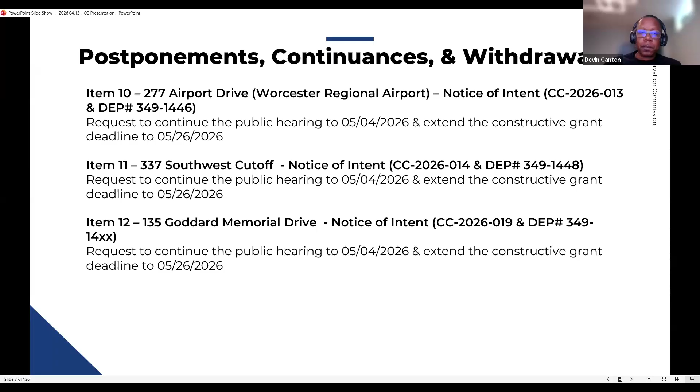First, are there any requests for continuances, postponements, or withdrawals? Yes, we have 3 requests for postponement tonight. All of these are requests to postpone the public hearing to May 4th, 2026 and extend the constructive grant deadline to May 26, 2026. We have item number 10, 277 Airport Drive, item number 11, 337 Southwest Cutoff, and item number 12, 135 Goddard Memorial Drive. Again, those are all requests to postpone the public hearing to May 4th and extend the constructive grant deadline to May 26th. Make a motion to postpone items 10, 11, and 12 as described. Second. Commissioner Canton? Aye. Commissioner Kirshner? Aye. Commissioner Nystrom? Aye. Commissioner Frattoni? Aye.

First order then of new business, a request for determination of applicability for Salisbury Street, Moreland Street, and Old Brook Drive rights of way, and 629 and 633 Salisbury Street. Is there somebody online from the city for this project? Yep.

Yes, my name is Steve Daunais. I'm from Tata and Howard. We're the engineers working with the city on this project. So this is a water main project along the streets shown here. It's replacing an existing water main. Road work is going to be within the existing paved area. There's probably two brook crossings.

And yes, it's highlighted project location towards the top and a project location at the bottom. And they're going to be directional drilling under the river in both cases. So access pits are 60 to 70 feet away from the edge of the water, and then it's just going underneath and coming out the other side.

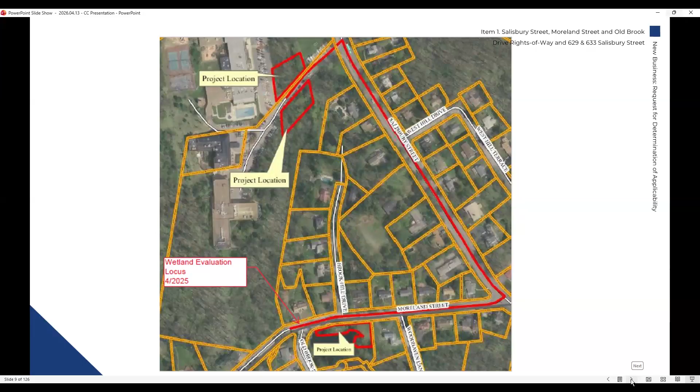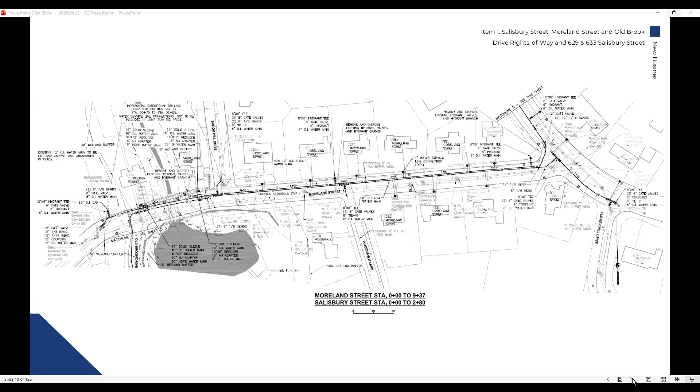Anywhere near the buffer zones, there will be straw wattles in place, silt sacks in catch basins just to prevent any debris getting into the waterways. Trenches will be backfilled at the end of every workday. Every Friday, temporary pavement will be installed. In the event of a heavy rainstorm or something else, temporary pavement may need to be installed prior to Friday.

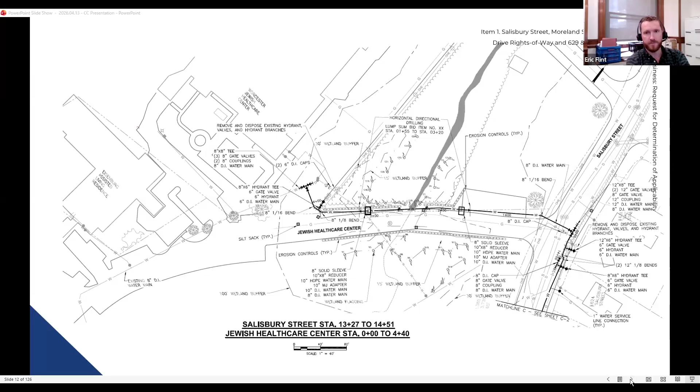We'd suggest a similar condition with a negative determination if the commission goes that route tonight. Our staff comments were minimal, just related to the type of sediment barrier, which I believe has been addressed with a revised plan, so we're all set. Commissioners, any questions or comments about the project?

I'd like to ask about the timing on each of these crossings. About how long do you expect it to take once you begin drilling, get the pipe in place, and close everything back up? I'm pretty sure they'll do each one in a day.

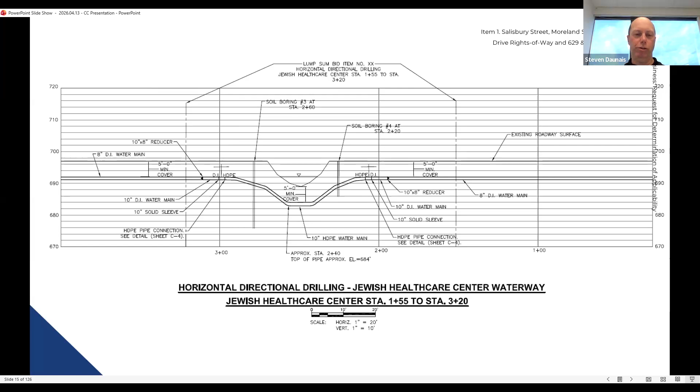So you're already familiar with the soil conditions underneath these sites, and I think one of them already has a crossing, correct? Let me get the street right - Moreland Street. Actually it's not underneath.

So there might be a day to prep and get ready, and then a day to install. Right, so a minimum amount of time for this to be open. I don't have any other questions.

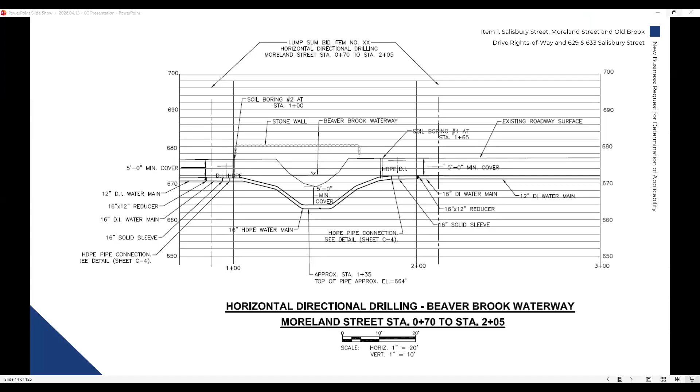I'm not seeing anyone. I'll make a motion for a negative determination. Second. Commissioner Canton, aye. Commissioner Kirschner, aye. Commissioner Nystrom, aye. Commissioner Fatoni, aye.

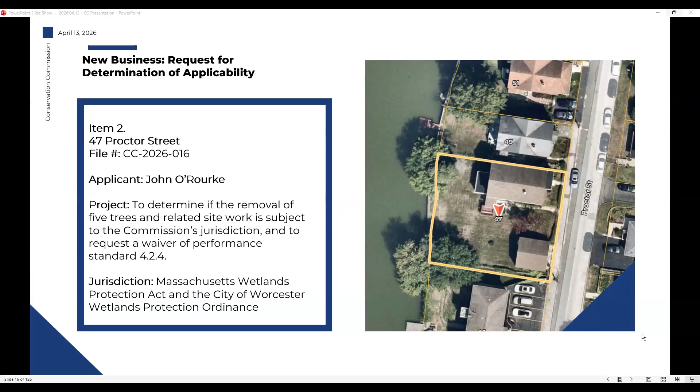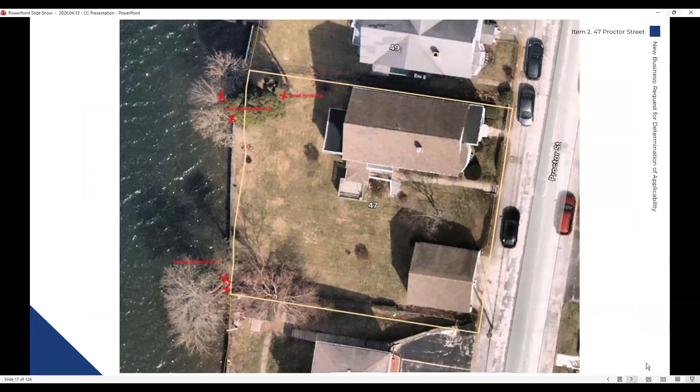That's great. There's trees by the retaining wall that have gotten so big they're at a 45-degree angle, and the branches were down in the water before the water came up 5 feet, so they're going to have leaves. You can see the pictures. They're going to crush these walls - these retaining walls are going to take the whole backyard into Indian Lake. So I'm asking permission to have a crane come in and park on Proctor Street.

It's like 50 feet. They're going to cut the trees about 6 inches to a foot above the base, lift them up, and bring them to Proctor Street to chip them and get rid of them. The wall is already cracking. What you're looking at right now, the water is probably 5 feet higher, and once the leaves come on and the waves start getting going, the wall's coming down, no doubt about it.

I don't even know what kind of trees they are, just horrible, ugly looking trees. I'll plant new trees to replace them - I love trees. But we have to get this done before my yard goes away. It's a rental. Understood, understood. Thank you.

Staff, any comments or questions about this project? So staff met with Mr. O'Rourke on site to look at the trees. There are essentially multiple stem box elders that are dug into the wall, with root systems dug into that wall at this point, kind of leading out over Indian Lake.

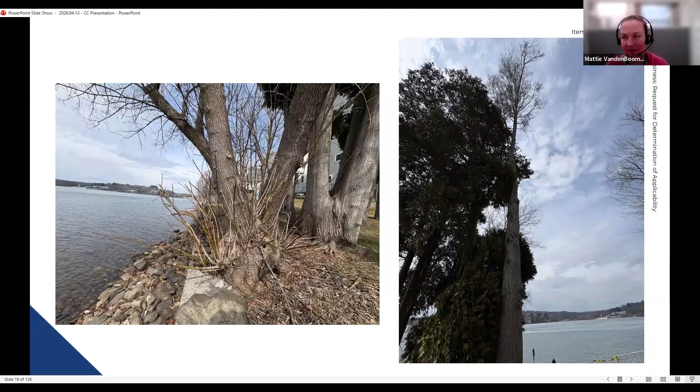Nope, you're good to move forward. If the scope of work changes for any reason, if you're not able to do the crane, just let us know. But other than that, you should be good to go.

Okay, thank you. Thank you very much. Thank you, have a good night. You too.

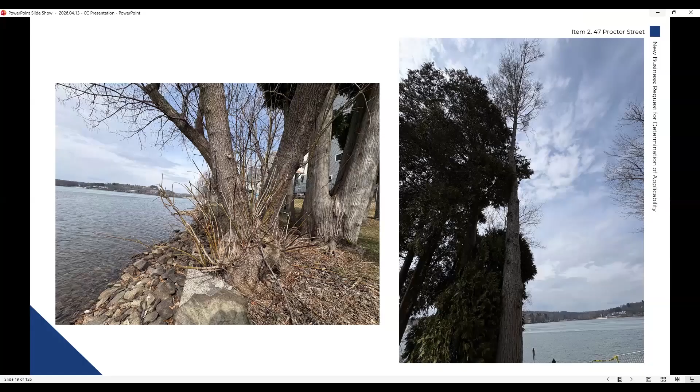Next item, number 3, 254R 504 Massasoit Road, 0 Sandra Drive, request for determination of applicability.

I was asked to unmute, but hi, this is Linda Hutchins with Mass Audubon. We're actually going to have Tom Lutzenheiser speak for us tonight. Okay Tom, you should be able to speak now. Good evening everyone. Sure, if you can hear me. Yes, I'm unmuted. Sorry about that. So I'm Tom Lutzenheiser, senior conservation ecologist with Mass Audubon.

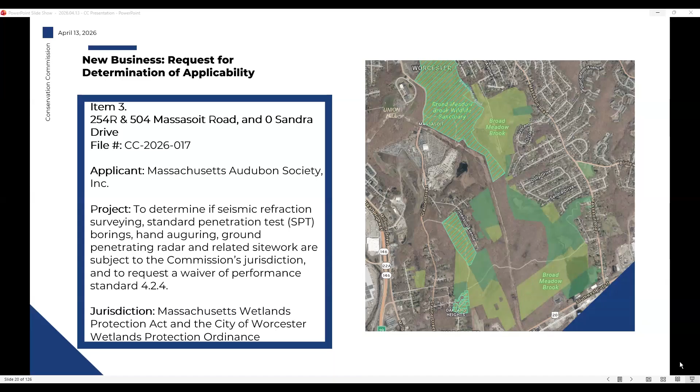For our RDA this evening, we are requesting permission to perform some geotechnical studies at Broadmeadow Brook. This is on property where the city is the deed holder under the Conservation Commission. This is in the context of getting preliminary information for the continued planning of a comprehensive wetland restoration project we are working on for the entire North Marsh area, between Dunkirk Ave and around this Sandra Drive area.

So at some point in the coming year or two, you'll be seeing a lot more information about this. In the meantime, we have a preliminary design and are working on developing permitting level plans to sort of kick the tires on our preliminary design. We are proposing various geotechnical studies, including seismic refraction studies, standard penetration borings, and ground penetrating radar.

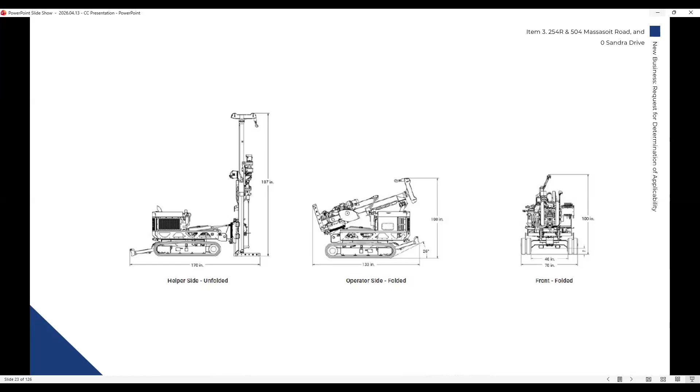Happy to answer any questions. Christy Pollock from Princeton Hydro, our consultant, is available as well. Or Linda, if you have anything to add.

We've reduced the number of borings proposed and are trying to keep this to as small an alteration, again temporary, as possible.

Any staff comments on the project? I think Tom just gave a pretty good summary. Our comments were mainly in relation to the standard penetration borings, given that involves the heaviest machinery to get down within the wetland resource area. So we had some questions about the temporary impacts that would result from that, how those would be stabilized, and what the proposal was for access. All those questions have been addressed at this point.

We would suggest a couple of conditions if the commission's willing to issue a negative determination related to fueling: that no fuel, oil, or other pollutants be stored within the resource area or 100-foot buffer, that any refueling of equipment take place outside of the 100-foot buffer zone, that the applicant shall take all necessary precautions to prevent the discharge or spillage of fuel, oil, or other products on any part of the site, and that a spill kit be present on site at all times.

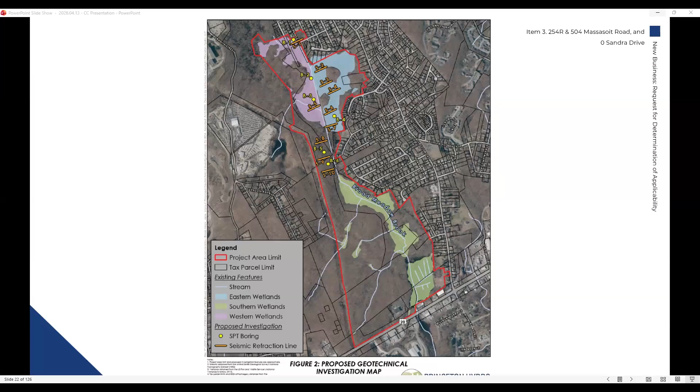Would the city be named as an additional insured? We had a discussion with the law department about this today, and the city would be looking to be named as an insured on a certificate of insurance for any of the contractors coming in with machinery.

Is there anyone from the public on this topic?

I'll make a motion for a negative determination with the conditions stated earlier. Second. Commissioner Canton? Aye. Commissioner Kirschner? Aye. Commissioner Nystrom? Aye. Commissioner Fertoni? Aye. You're all set on the RDA.

Just a reminder that staff recommends a separate motion to authorize this specific scope of work as the property owner. So moved. Second. Commissioner Canton? Aye. Commissioner Kirschner? Aye. Commissioner Nystrom? Aye. Commissioner Fertoni? Aye.

Next up, new business: request for amended order of conditions, 254R, 504 Massasoit Road at 0 Sandra Drive.

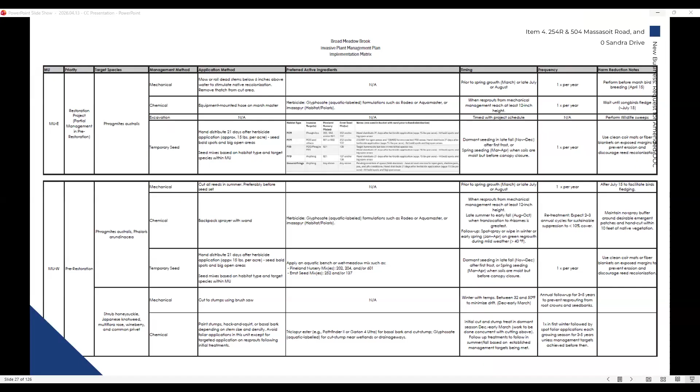The chemicals proposed for this are entirely temporary. They do not have any residual action on the seed bank. They're contact herbicides, and once they're absorbed into the plant, they are in the plant.

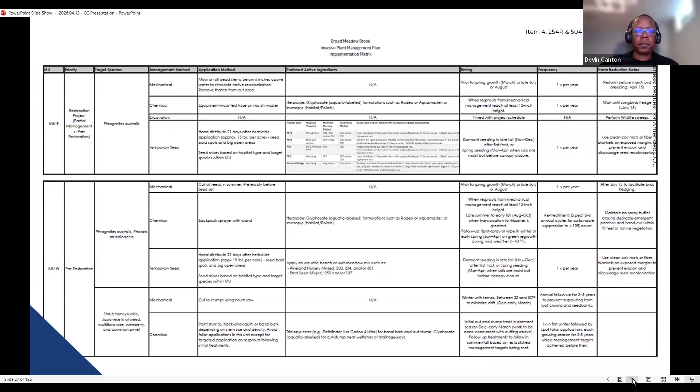Any other questions?

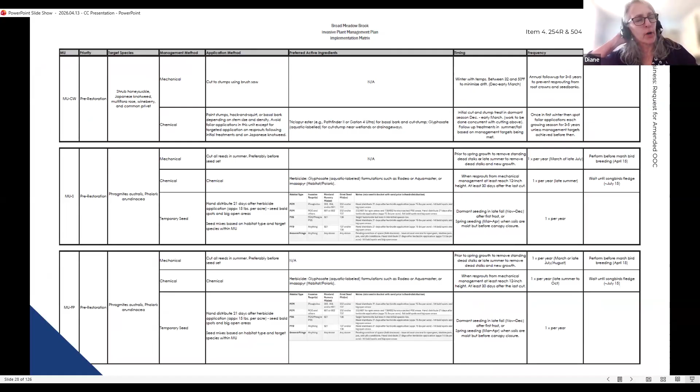So I have a question about managing the Phragmites in this environment, where the stands are small relative to the surrounding area. It makes sense to me to go in and get them out best you can. Where the stand is a complete monoculture, my concern is that what plan do you have for a native plant to backfill this area, and is the area even suitable for supporting a native plant? I mean, is it a high salt level? Is it a high contamination level? Just concerned that you'll eradicate the invasive and then there'll be nothing to take its place because the conditions in there, I know it gets a lot of street runoff.

It's a stormwater treatment system primarily. What's the plan if the native species don't establish, especially in these very large areas? Where it's a small stand and there's native plants surrounding it, then I feel confident that the native plants will probably fill back in, but these large areas are concerning. Even though it's invasive, it is performing a function of holding sediment and slowing down water through this system. So what's your backup plan?

I think that's a perceptive question. And that's why we're not proposing wholesale control of common reed on the east side of the North Marsh Causeway area. We only have a half-acre footprint in that site, really to understand if this treatment approach is effective in a stand that's probably been there since before the 1950s. So decades of common reed have come and gone on this site. So there is a bit of a learning opportunity here for us. Essentially, we want to understand that question before we're proposing to treat 12 acres of Phragmites.

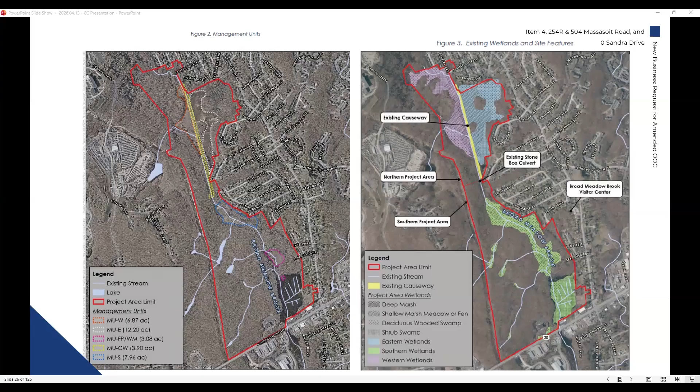Yes, essentially our preliminary design, and Eric had it on the screen briefly. I don't know if you want to go back to that slide. The vision is to renaturalize the stream channel, which to some degree involves removing a portion or all of the causeway. Now, we recognize that is an incredibly important recreational asset of the sanctuary and a beloved feature used by many visitors. So an important part of our project plan is to design access through the marsh, whether through boardwalk or bridges, to maintain that accessible trail through the project site.

Before you respond, I just want to make sure you understand that the applicant for today is only here to request a change to the invasive species management for the property. The removal of the boardwalk and all of that will be subject to review in the future. So what we're voting on tonight is just the change in the invasive species management.

Yes. Okay, so my question is out of order, is that? It's not out of order. It's just that you're welcome to ask the question, it's just we're not talking about that project in this meeting. That's coming. It hasn't really been designed yet, and it will go through probably many meetings before that starts to happen. Okay, so I'm wondering, there's zero plans, so it's not even useful to ask a question? If you want to ask a question about the weed management or the invasive species management tonight, that probably makes sense. I wanted to ask a question about access to trails from Hampton Street.

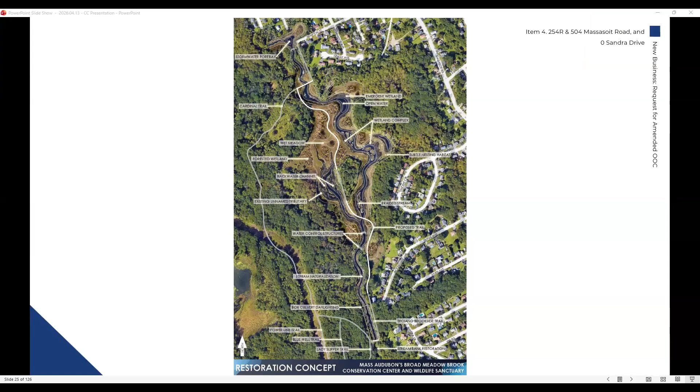Motion to amend the orders of conditions. This would follow the public hearing closing and then a discussion of conditions, as if it was basically a new order of conditions. Is there a motion to close the hearing? So moved. Second. Commissioner Canton, aye. Commissioner Kirschner, aye. Commissioner Nystrom, aye. Commissioner Frattoni, aye. Is there a motion to amend the order of conditions?

I'd recommend going over the conditions quickly since we have some proposed changes to the original order. We start with the finding that the work is approved as an ecological restoration limited project pursuant to 310 CMR 10.53(4). We would strike standard conditions 28, 45, and 47.

For standard condition for notification number 22, we would add a request for additional notification for any work involving the marsh master or other large mowing equipment, requiring our office be notified 48 hours in advance. We'd have a condition for adaptive management, recognizing that site conditions and invasive species composition may change over time.

The applicant may request approval from the commission to implement alternative treatment methods or target additional or different invasive species if monitoring indicates such changes would improve ecological outcomes. Any such request shall include a brief justification and description of proposed modifications, subject to commission review and approval at a public meeting or by written authorization. Approved modifications shall be considered authorized under this order, provided they do not result in increased adverse impacts to the resource area beyond those previously permitted.

We'd have a condition for monitoring reports, that the applicant submit an annual monitoring report to the Commission summarizing invasive species management activities conducted during the previous year. The report shall include a description of treatment methods, areas treated, target species, observed effectiveness, and any notable changes in site conditions. We'd also have condition number 56 for spill prevention, and that's it.

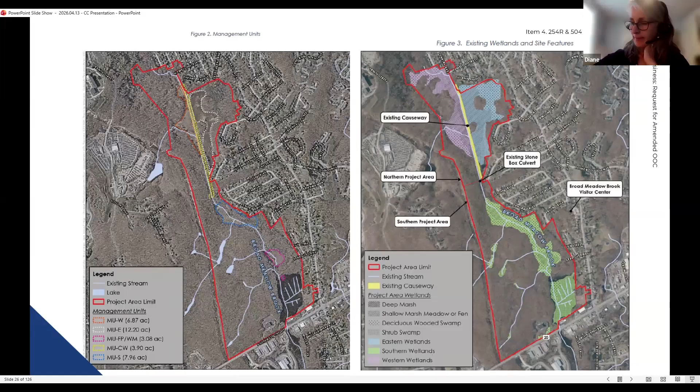Just a reminder, sorry to keep jumping in here. Sorry, my bad. Just a suggestion that we have a vote to separate the authorization vote.

So moved. Second. Commissioner Canton, aye. Commissioner Kirschner, aye. Commissioner Nystrom, aye. Commissioner Frattoni, aye.

Sorry about that, hard to see you. You're about a half an inch high. I'm sorry to keep butting in. Throw things at me.

Next item, new business, request for determination of applicability, number 5 on the agenda: Assabet Lane, Prouty Lane, and Pleasant Street rights of way.

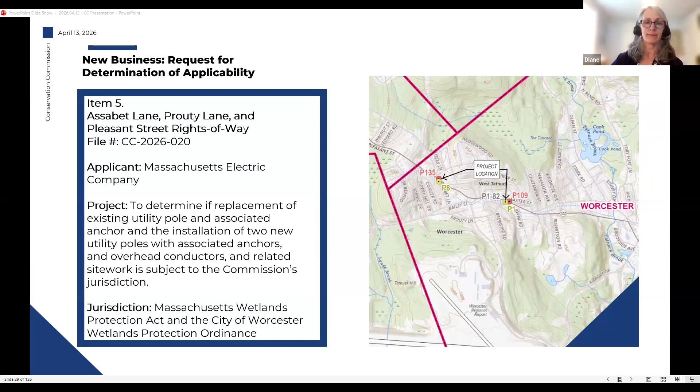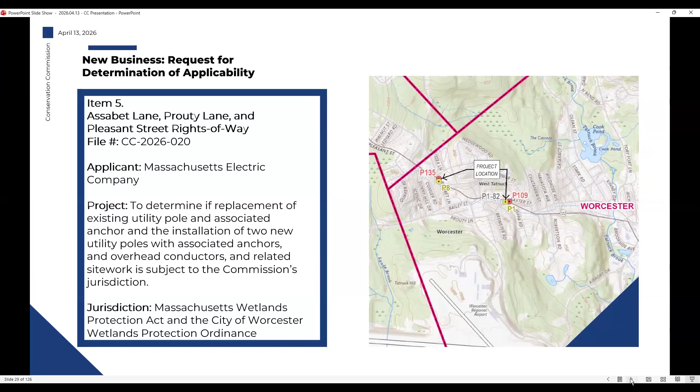Good evening, commission members. My name is Matt Kelly with Epsilon Associates, here on behalf of the Massachusetts Electric Company, also known as National Grid, to present this request for determination of applicability. Dan White from National Grid is also on the call. We have a pretty minor project associated with an existing feeder that runs along Pleasant Street and adjacent streets, including Prouty Lane and Assabet Lane.

The proposed scope of work includes installation of a new pole, pole 8, on Assabet Lane, with an overhead connection to the existing feeder along Pleasant Street. Any ground disturbing work in this area is outside the 100-foot buffer zone to BVW, which was delineated to the north side of Pleasant Street, but we do fall within 100 feet of a catch basin shown on this map on Pleasant Street.

There's also the proposed installation of pole 1, which lands within the 50-foot buffer to the intermittent tributary, and then a proposed anchor installation on pole 109, located along Pleasant Street. Pole 109 is located outside the 100-foot buffer zone to the stream bank, but it is within 100 feet of a catch basin. That summarizes the scope of work here.

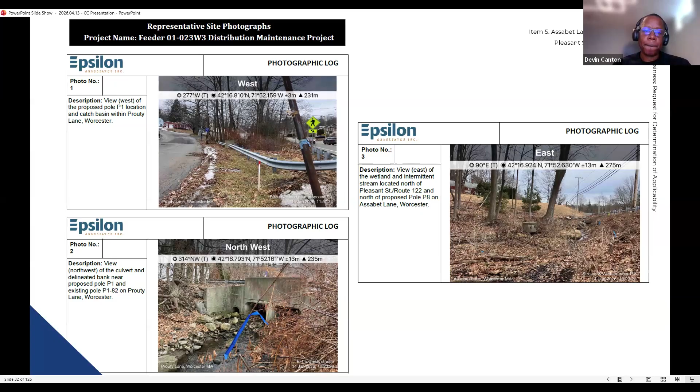And can you just talk a little bit about the timeline between the removal of the pole and putting in the new pole? Each pole is replaced within a day, so actually multiple poles are replaced per day. In relation to, if I understand the question correctly, the existing pole that will be replaced, pole 1-82 on Prouty.

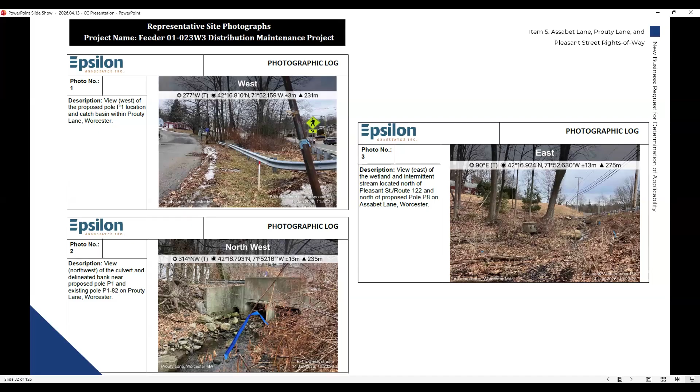I believe this is a National Grid owned pole, so therefore the existing pole would be removed at the same time. Sometimes, if it's a pole owned jointly by multiple utilities, National Grid replaces the pole, and the other joint venture would be responsible for removal of the pole. Oftentimes that's Verizon, and I cannot give a date on the removal of the existing pole upon replacement. I think that answers your question, but let me know if there's any other questions there.

No, that was good. I think you're saying if it's your pole, it'll be removed and replaced within a day. So if it is someone else's pole, does that fall under this RDA, or do they need to refile or ask questions to make sure they're doing things right for that removal? I believe the removal would be covered under this RDA as well. Okay, yeah, got it.

Anyone else? Is there anyone from the public on this? I will make a motion for a negative determination. Second. Commissioner Canton, aye. Commissioner Kirschner, aye. Commissioner Nystrom, aye. Commissioner Fatoni, aye. Are you staying on the call for the next one as well?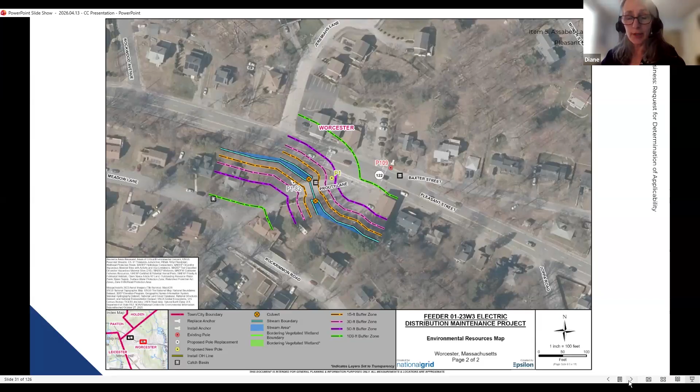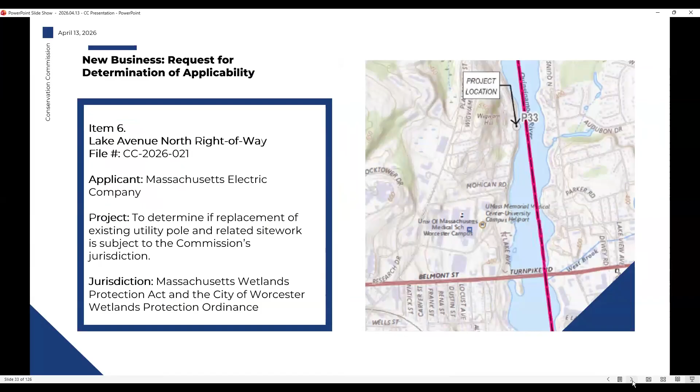Yep, okay, absolutely. Number 6, Lake Avenue North, right of way. So another small project here that falls within 100 feet of Lake Quinsigamond, the banks of Lake Quinsigamond, on North Lake Ave. Massachusetts Electric Company plans to replace existing pole 33, essentially in kind, right next to the existing pole.

Best management practices such as sediment control, straw wattle, will be used during pole replacement activities. Disturbed soils will be graded and mulched to temporarily stabilize soils, and then same situation here in regards to removal of the existing pole. If it's owned by National Grid, they remove it at the time of replacement; if it's a joint venture, then a separate utility is responsible for removal of the existing pole.

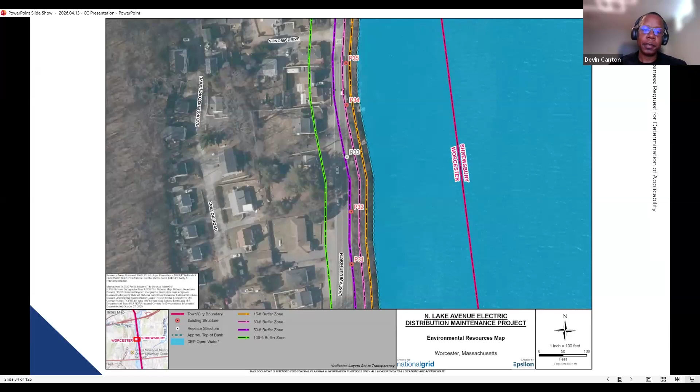Staff, any questions or concerns? No concerns from staff. Commissioners? General question: are the poles usually placed in a somewhat level area? They're not installed on slopes, is that correct?

Poles definitely can be installed on slopes, but in this situation it is on the roadway shoulder, and there is a bit of a slope there on the other side of the guardrail. So my question would be about the mulch - is there any concern about that getting washed away, or are there other methods to make sure? We're not talking about a lot of disturbance here.

It's probably 1 square foot, the size of the auger. So in my personal opinion, I do not think there is a high risk for soils or mulch used to temporarily stabilize them to wash away. Okay.

Anyone from the public? I'll make a motion for a negative determination. Second. Commissioner Canton, aye. Commissioner Kirschner, aye. Commissioner Nystrom, aye. Commissioner Fatoni, aye. All set?

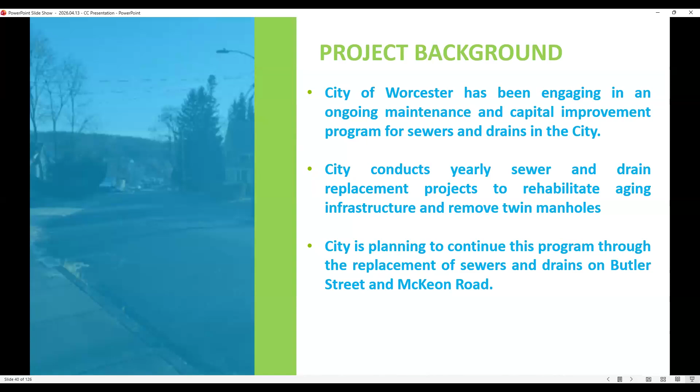The project involves replacement of sewer, water, and drain on Butler Street. The sewer manholes on Butler are twin — currently the sewer and drain are separated by plates in the manholes, but once construction is done, the manholes will be completely separate. On McKeon Road, we're just replacing the sewer and drain and extending it to the interceptor on Blackstone River Road.

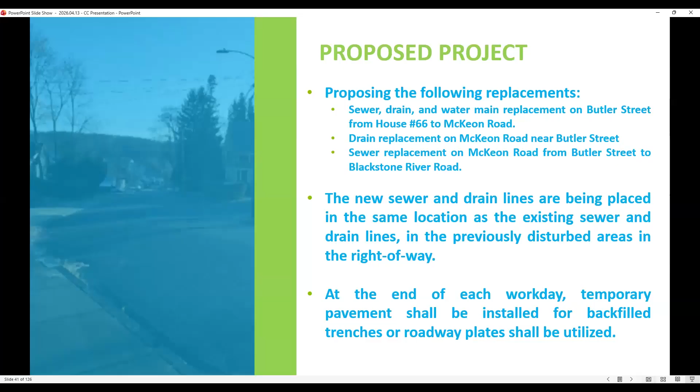The city will likely put the project out to bid early this summer, and depending on the contractor, construction may start in the fall or spring. It could be delayed to spring because the water main replacement on Butler will require temporary water service. And then I'll hand it back to Alex.

With the perennial stream, we had a 25-foot riverfront area, and we also had the 100-foot buffer, as well as the 15-foot no disturb zone and the 30-foot no structure zone. Next slide.

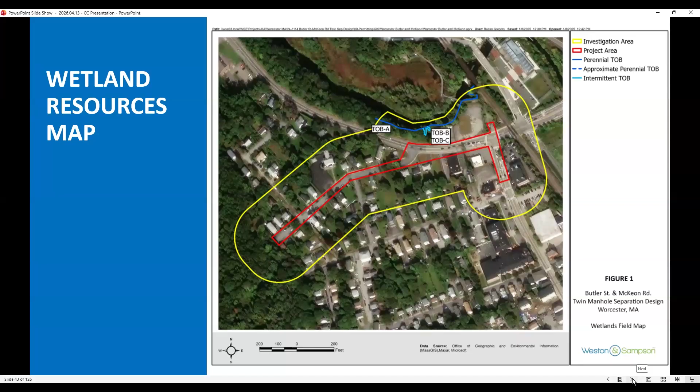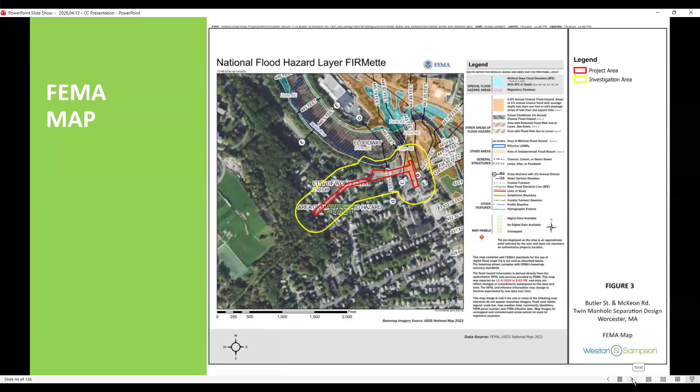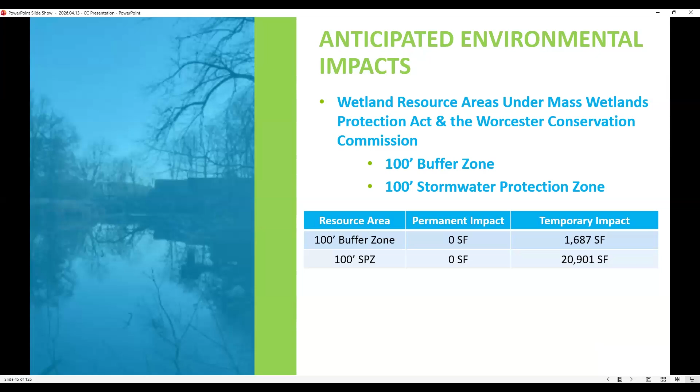This project is being filed as an RDA due to the exemption that states installation of underground utilities within existing paved roadways, which this project falls under. As previously mentioned, all impacts are temporary and within existing paved roads, so we are requesting a negative determination. I believe that is it — if there are any questions.

Staff, any questions or comments? No concerns from staff. Commissioners? I just have a question around sediment control during the construction phase, when the ground is open and there's dirt, frankly, in the street. Is there a regular practice of sweeping these sites and protecting the drains?

Yeah, we require drain protection on the catch basins. The material, if they're within the buffer zone for the resource, like at the corner of Butler and McKeon, the contractor is required to control any discharge of sediment into the drainage system.

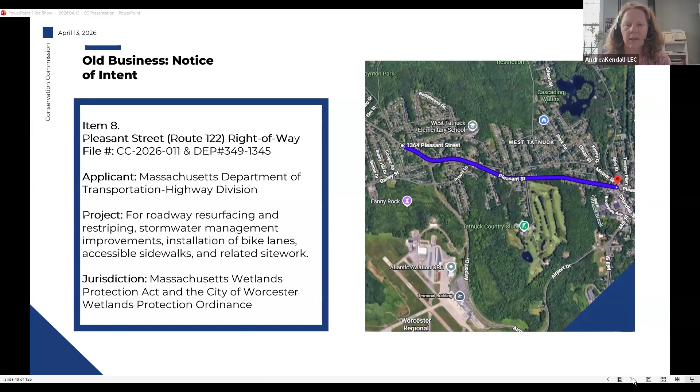Last meeting, we discussed some additional follow-up was necessary to look into the cold water fishery at Tatnuck Brook, and some clarifications on what might be further required by MassDOT.

And I should have provided some, Maddie and Eric provided some of the old notice of intent plans, but I wanted to bring to the commission's attention that in 2014, MassDOT implemented a stormwater retrofit project for Pleasant Street as it relates to protection of Tatnuck Brook.

As part of that project, they implemented stormwater control measures that included a new infiltration basin located kind of midway up the project corridor, pretty much adjacent to the golf course shown in the lower right-hand side. Then also as part of that project, right pretty much at the Tatnuck Brook area, 3 infiltration underground catch basin infiltration measures there.

So with that project, the water quality was already addressed and provided substantial improvement to provide thermal mitigation for the cold water brook, water quality improvements, as well as other drainage improvements.

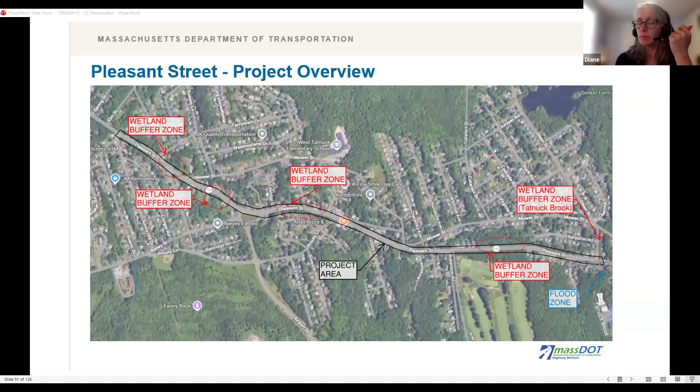Are we able to have them share their screen so we can see where these are? Yep, you guys should be able to share. Okay.

So I have that up here, and I think you can all see it at this point. The red line here is about where the current project terminus is, and these are the catch basins, the stormwater BMP proposed leaching basins. There are 3 units here and 1 unit on the north side of the street with a riprap outfall. That's one component of it.

And further west of Tatnuck Brook is the stormwater basin, the infiltration basin here. This takes much of the overall paved runoff from the paved surface and directs it in. Only if stormwater capacity is exceeded from major storm events, there's a spillway there, and then an outlet control structure.

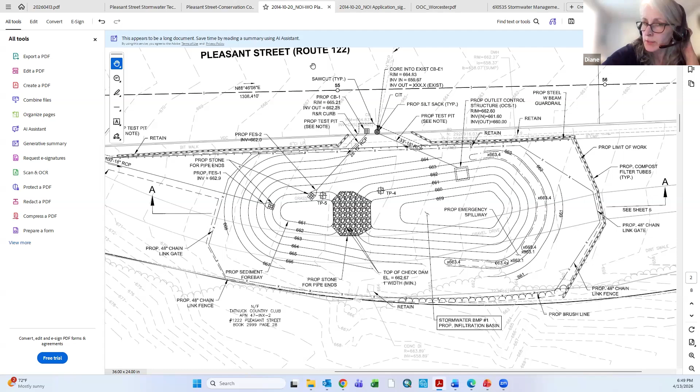Could you just point those out on the map, their location? Yep, so here's our plan set. This is the eastern project terminus. The area in green on both sides of the street are those existing leaching basins, subsurface here.

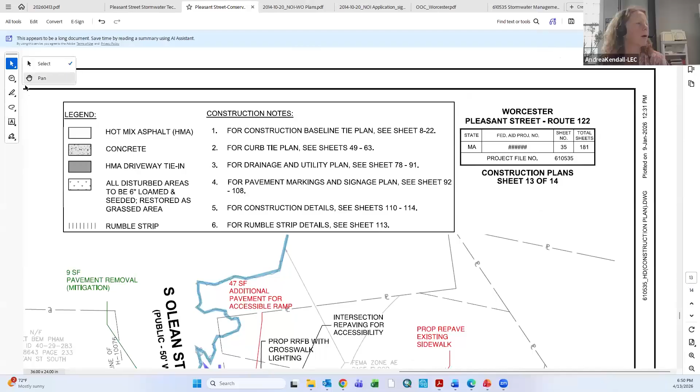And then, so just maybe go further out on the map, not so close up. So again, here are the leaching basins - sorry, I'm not being clear. I don't know if we can have an aerial view or a larger map, right? Let me take a moment to pull that up, just because our plans don't have both projects on them.

So Tatnuck Brook is up here. Here is that driveway, and here are probably one set on the south side of the leaching catch basins. And then here's the brook here. And then the other catch basin, leaching catch basin, is here. Coincidentally, there's a little bit of a change in shading of the pavement, so that's about where the project terminus is. And then scrolling out a little bit, that stormwater basin is located just north of the golf course. I can go to street view if that might work, but that's over here.

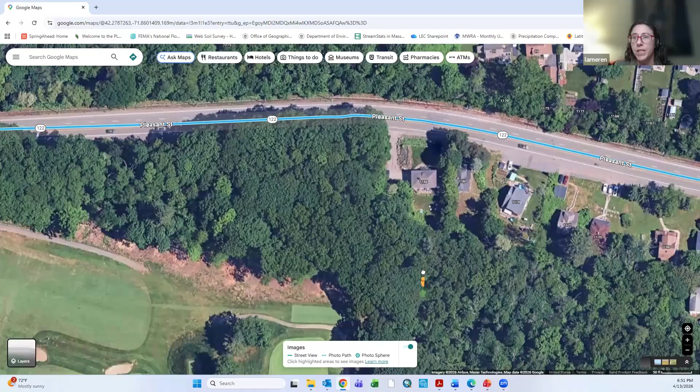Got it. And so who's responsible for maintaining these? They are DOT basins, and therefore DOT is responsible for that maintenance. Okay, has anyone looked at or inspected these in the last 10 years? In general, our catch basins and stormwater facilities are inspected annually and cleaned out and maintained as noted during those inspections. I don't have a record of the inspections for this particular basin, but our catch basins and infiltration basins are inspected annually.

Okay. I'm sorry, I think I cut off staff - is there staff questions or concerns on this? That's okay, I don't have too much to add. We did reach out to the commenter who raised this question during the last meeting, and the document he was referring to was the 2004 MassDOT Stormwater Guide, which has been replaced by the 2023 version. Regardless, we also reviewed the memo submitted in response regarding compliance with Standard 6, and we don't have any concerns about the proposed work meeting the stormwater standards as applicable for this project.

Okay, commissioners, questions or concerns? No questions or concerns, just comments - I'm glad the infrastructure was there to address some of those issues. I think it would be interesting to find out, I'm not expecting to hear this tonight, but to find out to what degree of success those structures were, what sort of impact they actually had on that brook.

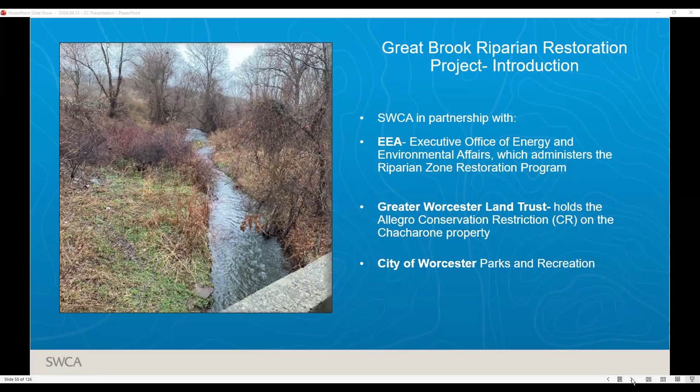On this project in particular, we worked with the Greater Worcester Land Trust, who has a conservation restriction on the northern side of the brook. The city of Worcester also worked with us and gave us permission to do native plantings on their property, which is south of the brook. If you go to the next slide, you can see the 2 parcels we're proposing the plantings on.

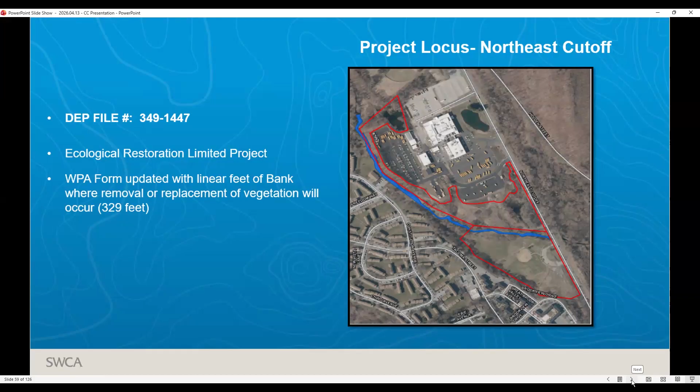So last time we were here, we didn't have our DEP file number. We did receive that, and they confirmed this qualifies as an ecological restoration limited project. They wanted us to update our WPA form with the linear feet of bank we're proposing to revegetate or remove invasive species on, which is 329 linear feet. So we updated our form and sent that over to the DEP and the commission staff.

This is just a list of trees and shrubs that we're proposing out there. We designed the project to restore 3 different habitat types: a wetland habitat, a riparian zone—between the wetland and the upland but within 200 feet of the river—and then purely upland habitat. We picked the species based on the hydrology they would do best in.

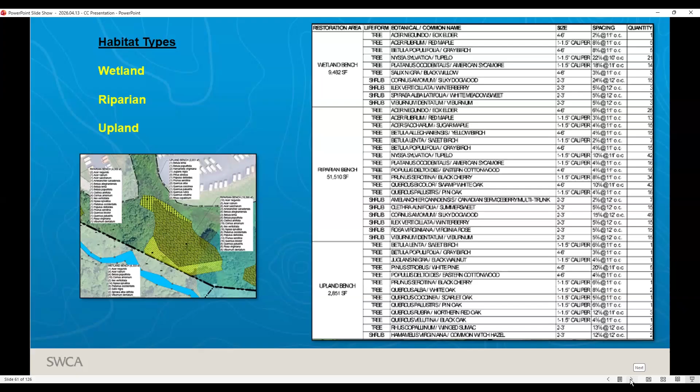So in order to plant about 400 plants, we're going to have to prepare the site. This is written in the notice, but we'll be proposing to mow some of the herbaceous vegetation out there so we can get the plants in the ground and also monitor them in the future. It also gives them a chance to grow up before the tall herbaceous species start coming in the spring.

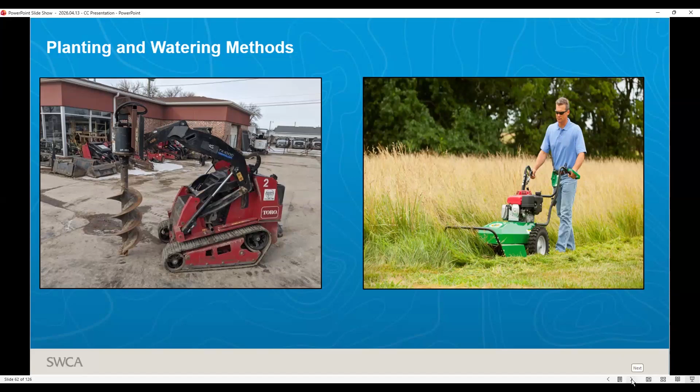Also, we are going to be watering the plants, and we want to use a low flow water pump and use water from Great Brook to water some of the trees and shrubs. There's also an access road, so we have water tanks in our trucks we can also use.

And lastly, we're proposing to do mechanical and chemical invasive plant management in our planting zones, again just to really give our native trees and shrubs a chance to grow and thrive. So that's basically it in a nutshell. Nothing else came from the DEP comments, and I'd love to answer any other questions the commission might have.

You're on mute, Diane. Sorry. Thank you, staff.

Sure, thank you. As Meredith mentioned, we did receive DEP comments, nothing significant. I do have a question now that we've talked about the irrigation system again. The withdrawal from the brook itself isn't regulated under the Wetlands Protection Act based on previous conversations with DEP. But I'm curious about the procedures or process for doing that. Is that something manually operated by a person on site, or would it be running in the background unsupervised?

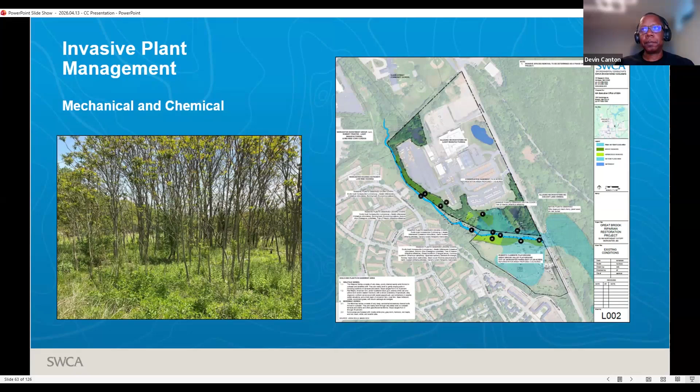No other questions on the conditions. Is there a motion? Motion to issue the orders of conditions as described. Second. Commissioner Canton? Aye. Commissioner Kirschner? Aye. Commissioner Nystrom? Aye. Commissioner Frattoni? Aye. Good luck with this project. Thank you so much, we'll keep you guys posted. Thank you, have a good night. You too.

Okay, so 10, 11, 12, all postponed. Next item up, item 13, notice of intent, 00 and 2 Tyson Road.

Can you hear me all right, John? Should be. Yep. All right, how are you doing?

John Plifka, McCarty Engineering, here tonight representing the applicant. We are proposing a 3-unit single-family building at 2 Tyson and 0 Tyson Road. The property is approximately 0.24 acres within the RL7 zone.

It's currently vacant. We're proposing that each unit will have its own driveway, and it'll be serviced by municipal sewer and water.

Even though stormwater management standards don't apply to 3 units or fewer than 4 units, we are proposing an underground infiltration basin located at the rear of the building to infiltrate runoff from the proposed rooftop.

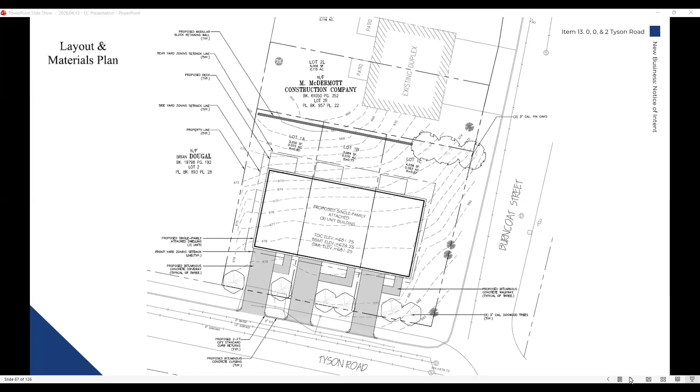This is a local filing only due to the proximity of the existing drainage infrastructure in the road, and as such we are proposing erosion control measures to be implemented for the duration of construction.

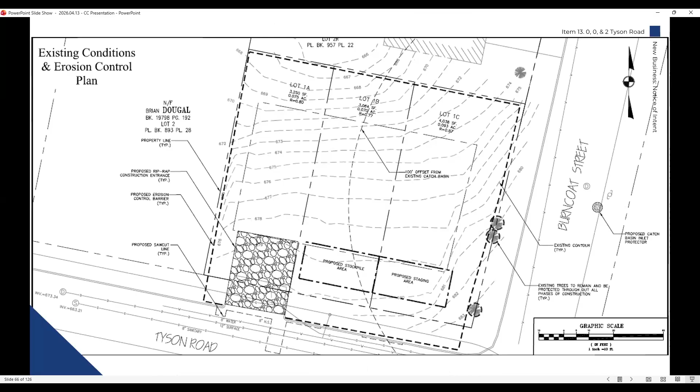We received a handful of comments from staff that we responded to accordingly. The biggest one was just extending the erosion control barrier and adding some tree protection. With that said, I'd be happy to answer any questions the commission might have.

Thank you. Staff comments? Most, or all, of staff comments have been addressed at this point with revised plans. This is a local only filing due to proximity to a catch basin. Staff doesn't have any concerns at this time.

Thank you. Commissioners? No? Sorry, nope, I was saying no.

I just have a question about the infiltration system. It sits across 2 parcels. Who would be responsible for the maintenance of this unit? It's going to likely be condoized, so it would be under that entity, and all owners would have responsibility for that.

Okay. Is there anyone here from the public on this? No.

Is there a motion? I'll make a motion to close. Second. Commissioner Canton, aye. Commissioner Kirschner, aye. Commissioner Nystrom, aye. Commissioner Frattoni, aye.

Proposed order of conditions? In addition to the standard conditions, staff recommends condition 32 for trees to remain, 37 for stormwater management system maintenance, 38 for infiltration unit inspection, 49 for dewatering, 50 for cement truck washing, 56 for spill prevention, 66 for sand and salt, and then ongoing conditions for 37, the stormwater system maintenance, and 66 for the sand and salt.

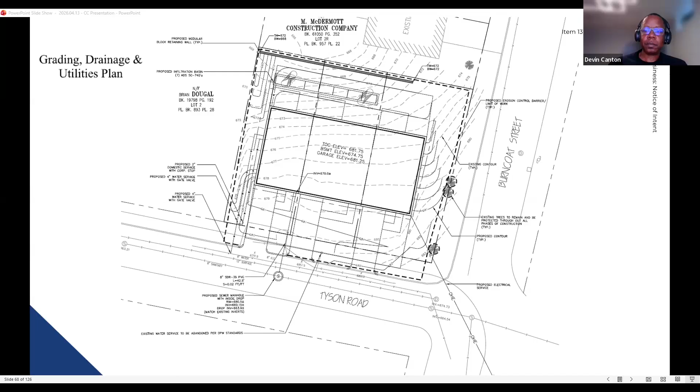Is there a second? Second. Commissioner Canton, aye. Commissioner Kirschner, aye. Commissioner Nystrom, aye. Commissioner Frattoni, aye.

You're all set. All right, thank you for your time. Have a good rest of your night. You too.

Item 14 on the agenda: new business, request for amended order of conditions for Brant Lane and 0 Grafton Street.

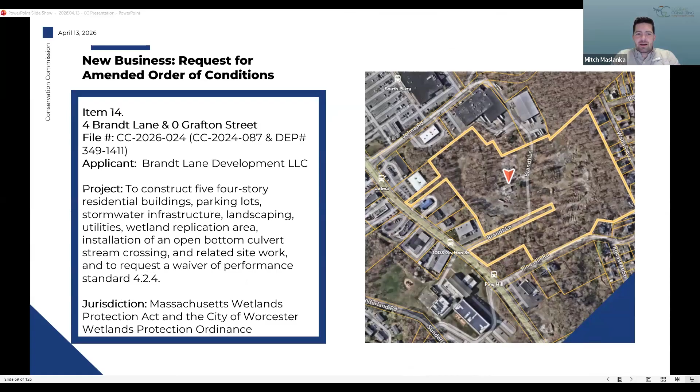Good evening, Commission. This is Mitch Maslanka with Goddard Consulting, here representing the applicant this evening, Brandt Lane Development LLC, for a request to amend the order of conditions to construct five four-story residential buildings and related infrastructure at 4 Brandt Lane. If I may have the ability to share screen, I can start sharing our materials.

You should be good, Mitch. Excellent, thank you. Back in June of 2025, the Commission had approved an order of conditions to be issued for the development of 4 Brandt Lane. It was for the 5 residential buildings.

And in the appeal period, DEP had issued an SOC intervention letter. They had appealed the project and stated that they wanted to further review the bank impact form and standards to see if there would be adverse effects to bank resource areas.

So in our SOC discussions with DEP and the conservation agents, we've been able to work with the project team to come up with an alternative plan to building 4's site layout. In addition, we have revised some other areas of the site to further improve conditions of buffer zone and resource areas.

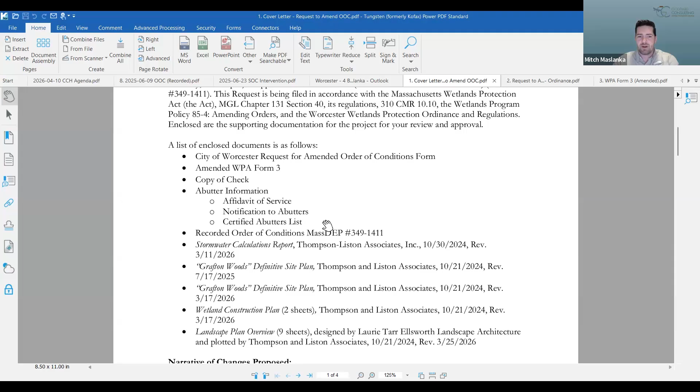We amended our WPA Form 3 due to us reducing bank impacts, and we did provide that documentation in the form. We also provided the other procedural elements, including the filing fee under the Worcester ordinance and abutter notification. The Worcester conservation agent confirmed that the legal ad was run for this public hearing.

We provided previously approved plans as well as the newly proposed alternative plan. The main revisions we've proposed on the site plan now relate to Building 4's layout. I'll get to that screen for you.

Here's our existing conditions of the site, again, as a reminder. It's a large site, going to be split into five different parcels. This is what the site layout used to look like, with Building 4 in this L shape, being constructed over where an existing intermittent stream and large pipe are carrying flow through right now.

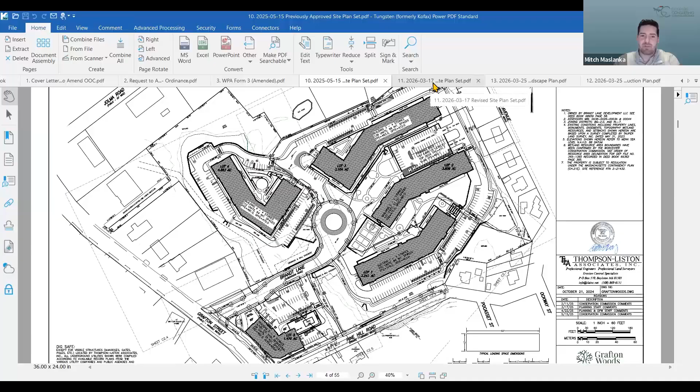The plan that was approved had a rerouting of the stream around this development. The proposed revisions now will not impact the stream, without any wetland flag shown—just an outline of where that stream is here. We've adjusted Building 4's footprint to the left to avoid impacting that stream, so there's no relocation of the stream around the development footprint.

We are still proposing restoration of the intermittent stream to the south of the development, as this is existing degraded stream flowing over pavement for a significant length, then flowing into this pond pool where these two streams eventually merge before going under Brandt Lane.

An additional aspect of our request to amend the order of conditions involves impacts over by this portion of the site, Building 1. This dog park was initially proposed to be larger. After our site visit with DEP, there were several large mature trees in this area, and they had requested if it was possible, in the limit of work, to spare the cutting of those large mature trees.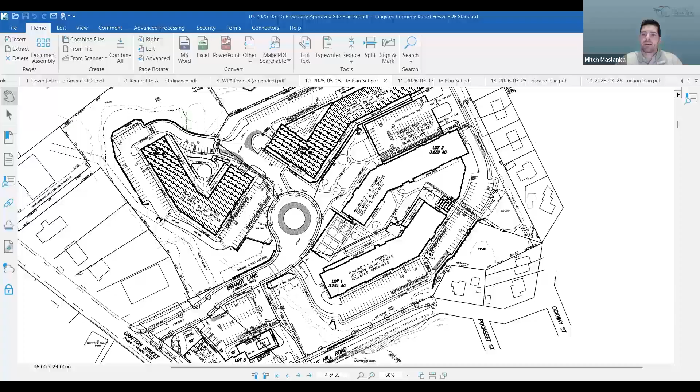Showing this plan here, this is the old plan—you can see it was much larger, going up to this lot line. It's now proposed to be much smaller, not going as close to this wetland down here. So buffer zone impacts were reduced in an effort to spare the removal of large mature trees.

Our request to amend the order of conditions will be centered around having this aspect of the plan revised, as well as revisions made to the work on Lot 4, because there is a significant difference from the previous plan to this plan on Lot 4—that being access roadways, parking areas, no longer rerouting the stream, keeping the existing stream, the stream crossing, and we are providing restoration of the stream channel with a revised mitigation plan for the buffer zone around it.

I'll get into those very specific details, but before I move on, are there any questions about the overall request to amend the order of conditions and the high-level topics involved?

Steph? No questions, no. Commissioners? No. Okay, so let's get into the nitty-gritty then.

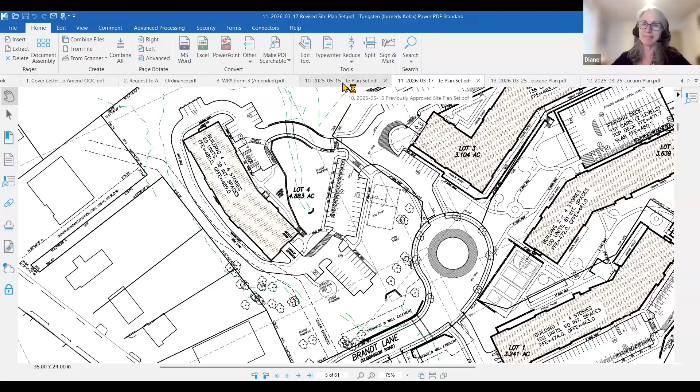Excellent, I will proceed. So I'll go to our more in-depth landscape plan—actually, we'll do this plan.

This is a plan sheet in the plan set that highlights our impacts to wetland resource areas. To the north, where the stream used to be proposed to be rerouted around the development, we're now going to propose a crossing over an existing area where there's an existing round corrugated pipe. Water currently flows in a stream, goes through a pipe, and then into this intermittent stream that is in a linear fashion, and this proposed crossing is designed to meet stream crossing standards.

We've provided our dimensions of the culvert here to show that it is spanning the banks by at least 1.2 feet on each side. We are meeting the openness ratio of 0.82 minimum, so this will be an improvement to that very specific area. Instead of having the small round corrugated pipe, we'll have a larger box culvert meeting stream crossing standards.

The access roadway will come in here, and we'll have parking and access to the building in this area. There'll be retaining walls tightening our limit of work at that crossing area. Since there's BVW to the north of it, we aren't proposing any BVW impacts—very similar to the previously approved plan, which also did not propose BVW impacts. We split up our impact areas just to make some distinctions.

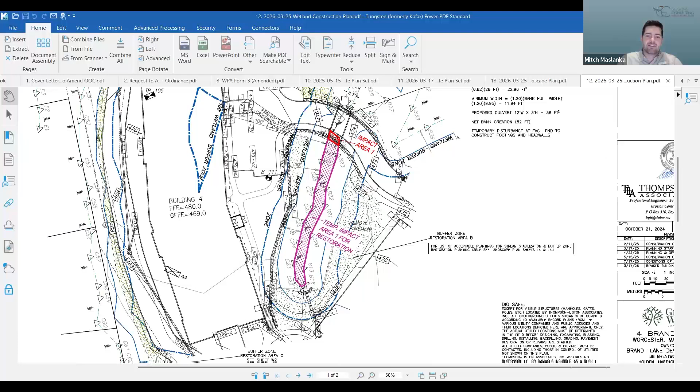We also have, just south of there, the stream flowing into that long pipe, which eventually discharges into a plunge pool just directly north of Brandt Lane. That pipe is proposed to be replaced, as it likely is unable and unsuitable to be constructed over with the infrastructure proposed. So that pipe will just be replaced in place, and it will discharge slightly north of where it currently does.

We are proposing to add resource area in between those two areas. The stream's going to discharge onto a riprap pad to dissipate velocities, since it's going through that long pipe for a long distance, potentially at high speeds during stormwater flows. We do want to dissipate those velocities as it comes out of the stream channel before entering a newly constructed stream channel, where it will merge with the stream currently flowing over pavement.

Also, the top of this area, where the stream flows into that paved swale, is all proposed to be reconstructed as a natural stream channel, having more natural stream substrates similar to what exists up-gradient and down-gradient of Brandt Lane. I went over that in length during the original proposal hearing process for what the stream substrates would be. There's going to be no change in what the stream substrate and bank will look like, and how to stabilize them—some minor modifications to its flow path, and no longer having the stream channel merge further north. Instead, it's going to merge closer to where it currently merges, north of Brandt Lane.

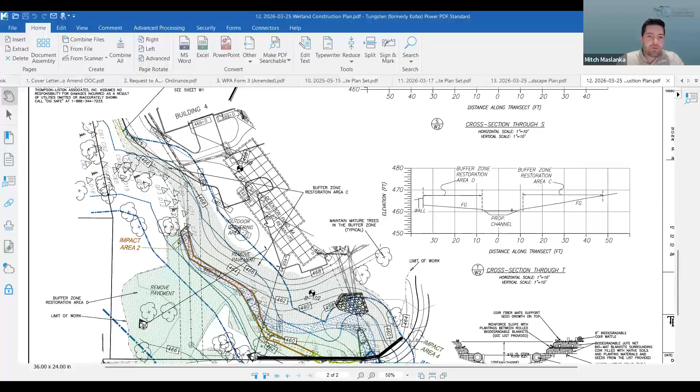That summarizes the vast majority of the overall changes in terms of resource area impacts and buffer zone impacts. I'll just touch upon the landscape plan before I toss it over to Patrick Healy from Thompson-Liston Associates. He's the civil engineer who put these plans together and designed the civil engineering for the project, so I'll have him do the stormwater presentation.

As you can see, the landscaping plan is quite robust. This was a revised plan sheet the commission has available. Due to limitations the city of Worcester has on plant species because of invasive insects, it's not as diverse as we'd hoped, but they're plants native to the area, many previously approved, just in different locations. We're doing silky dogwood and speckled alder closest to the streams, and red mulberry as our upland tree of choice in the buffer zones adjacent to it.

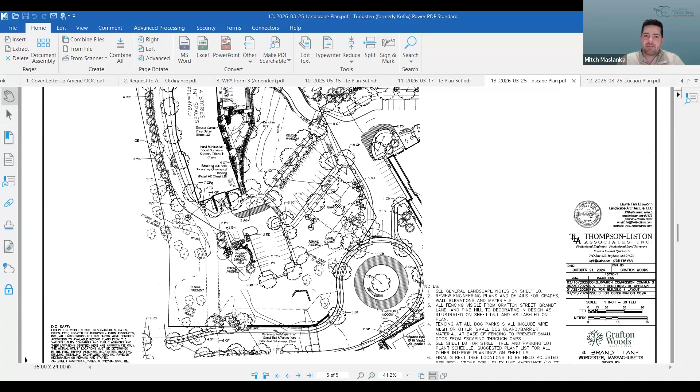That covers that aspect of the project. So are there any questions on what I presented prior to us shifting to the stormwater? I'm good for now, I'll give some general comments once the applicant's done with their presentation. Okay, commissioners?

Devin, I think you're muted. Devin, I think you're still muted. It might be a mic issue because I saw you were unmuted when you were trying to speak, but I couldn't hear you. Okay, keep going. Yeah Devin, we're happy to hear your comments once you get your microphone working. Hello? There you go, go ahead.

Yep, so on this slide you were just mentioning that those trees would be removed if they needed to. Do you have a replacement strategy if they were to be removed?

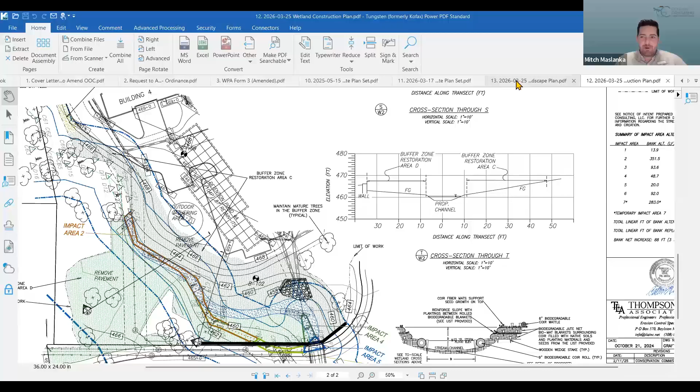Yes, we have a very robust landscaping plan for the area. So if one of the trees that's to remain—like right here, these two smaller ones are the trees proposed to remain—if they do get removed, we're more than happy to add in supplemental plantings to fill in the gaps.

Great. And each area is going to have proper seed mixes too—the wet mix with wetland herbaceous plants proposed in the wetter areas, and in the more upland areas we're going to have the wildlife conservation seed mix.

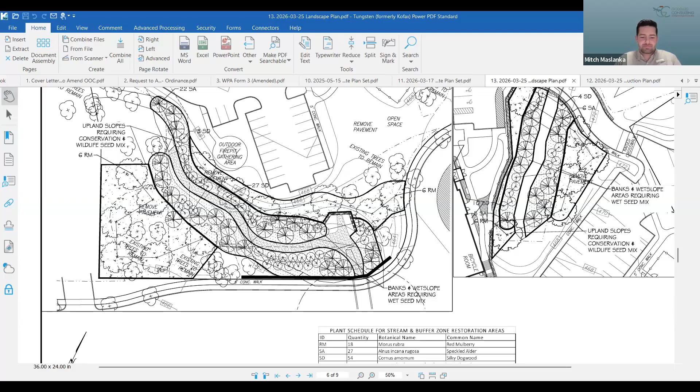So let me see, Patrick, are you on by chance? Yes, hello everyone. So Mitch, if you could go back to the overall plan that shows building 4 with the stormwater units, I think that's a good place to start.

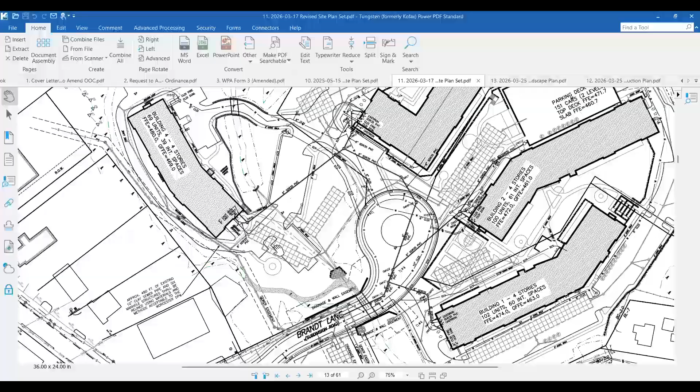When we reconfigured this building and moved it over toward the west, toward Grafton Street, that ended up putting the building where we originally had the infiltration system designed. So looking at the test pits and subsurface conditions, we're able to replicate the detention function of that system, but the groundwater conditions here are higher, so we're not able to maintain the same level of infiltration. There will still be some infiltration, but not what we had initially proposed. By reconfiguring these underground detention and infiltration systems, we're still able to meet our targets for matching pre-development and post-development flows to the extent that we can.

Mitch mentioned the replacement of the culvert. You remember walking out there—there's an 8-inch pipe where the stream goes in, and where it discharges at the other end it's a 42-inch pipe, and we really don't know what's going on in between. We're just proposing to replace that with a new pipe that will last for a reasonable lifespan, rather than trying to cobble something together with what's there today.

I can tell you that overall, by reducing some 30 odd units from the building and taking away that additional surface parking, the overall impervious area in this part of the site was reduced by approximately 15,000 square feet. That did help us with our stormwater calculations and our cover calculations, so all of those metrics actually look a little bit better.

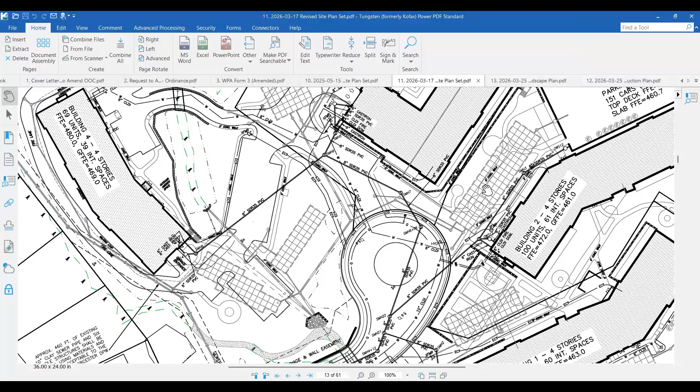So is there a motion to continue? Oh, please tell us your questions. We'll be prepared to answer them. We've already been here for over two hours. I want to make sure everybody can at least get some dinner tonight. A motion to continue. Well, if you'd like to send them in writing through Eric, we'd appreciate that. We'll try to answer them for you. Thank you. Second.

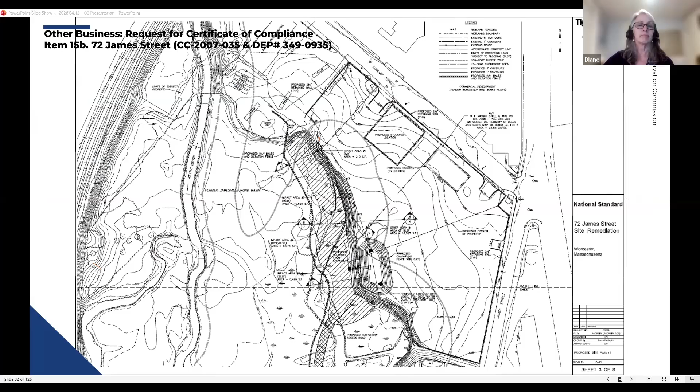72 James Street. All right, so we should have some applicants online. Rick, you should be able to unmute yourself. Okay, thank you. So my name is Rick Hanavan, I'm an environmental scientist with Tighe & Bond. Mike Travato, also with Tighe & Bond, is on.

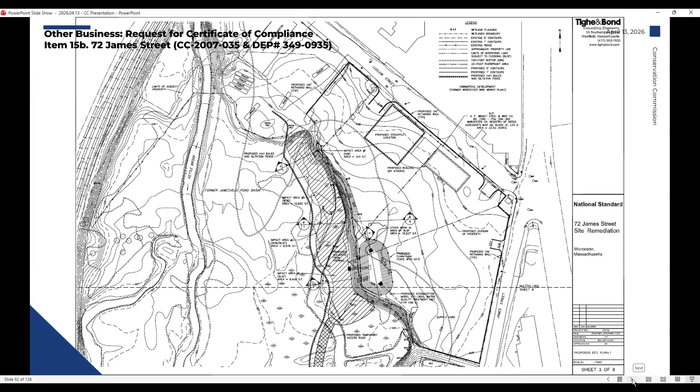The owner came before the commission back in 2018, I don't have the exact date in front of me, for an RDA for vegetation management. This time we're both trying to get the older order closed out with this submission, and then would hope to come back to the commission to file a notice to allow for ongoing maintenance as required by the conditions for the cap. That work is in the buffer zone.

That's really the motivation for trying to close this out, other than the fact that it's been well over 10 years that's been kind of unresolved, even though the project has had review from the state on the cleanup side. It's really just trying to close this open piece of work out so that we can move forward with the management of the cap.

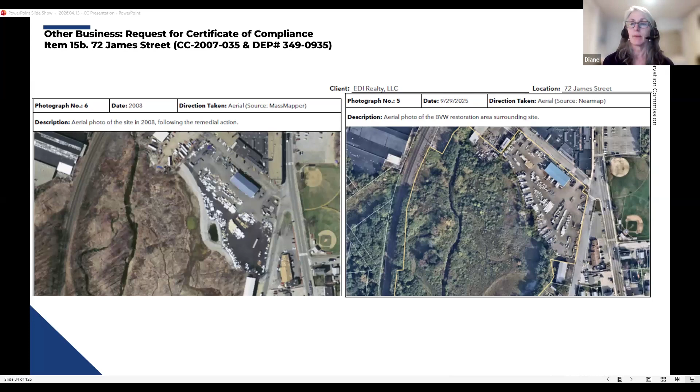Thank you. Commissioners? I'll make a motion to issue the certificate of compliance. Second. Commissioner Canton, aye. Commissioner Kirschner, aye. Commissioner Nystrom, aye. Commissioner Frattoni, aye. Thank you.

Next up, enforcement orders. So we sadly do have one new enforcement order that was added, our first one of the year. This is at 612 Grove Street.

It looks like last November, December they did install a driveway without any permits. It is within the 30-foot buffer, so staff did issue an enforcement order requiring that they have a wetland scientist come out and review the area, determine how much impact it has on the buffer and what needs to be done to restore it. There are also 2 storage sheds located pretty close to Delaney Brook, and you can see there's some disturbed soil, so we did require that they install straw wattles immediately to prevent any of that sediment from moving into the brook, with some rain coming in the forecast now that we're in spring.

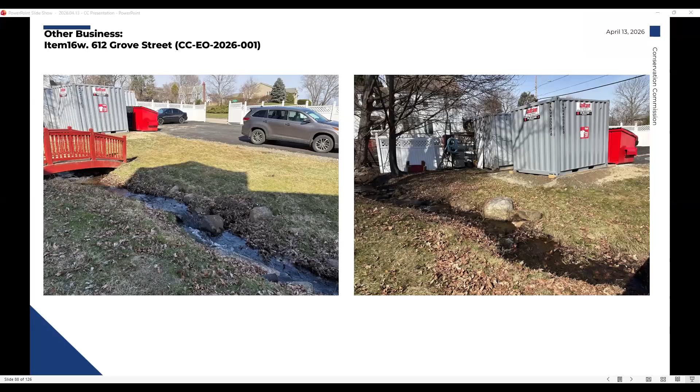So at this time we're just looking for the commission to ratify the enforcement order. We did require that the owner come in to our next May 4th meeting, but just looking to ratify the enforcement order. So moved. Second. Commissioner Canton, aye. Commissioner Kirschner, aye. Commissioner Nystrom, aye. Commissioner Frattoni, aye.

Are there updates on any other enforcement orders? Nope, no updates.

Open space discussion. Staff has settled on Parsons Cider Mill for our Earth Day cleanup. That will be this coming Saturday. Our plan is to meet at 9 a.m. and go to about noon. Our plan is to meet on Merchant Street and park along there. So if you'd like to join us, feel free. But there's also a bunch of other locations throughout the city that you're more than welcome to sign up and join. So if you're not doing anything this Saturday, come on out and clean up Worcester.

What's the forecast? It's supposed to be good. It's not going to rain for the first time in a couple of years. So that's exciting. So you're starting at 9? Yep, okay.

Any discussion of active projects? Nothing for staff. Minutes to approve?

We have the March 23rd, 2026 minutes. Motion to approve. Second. Commissioner Canton, aye. Commissioner Kirschner, aye. Commissioner Nystrom, aye. Commissioner Frattoni, aye.

Anything on the wetland protection ordinance and regs? Nothing this meeting for the little schedule we were hoping to be on. I was aiming to get the regulation update draft done by this meeting. We've had a large uptick in other work over the past month, so that's kind of been put on the shelf for the past few weeks, but I'm aiming to pick that back up again and hope to get an update by the next meeting.